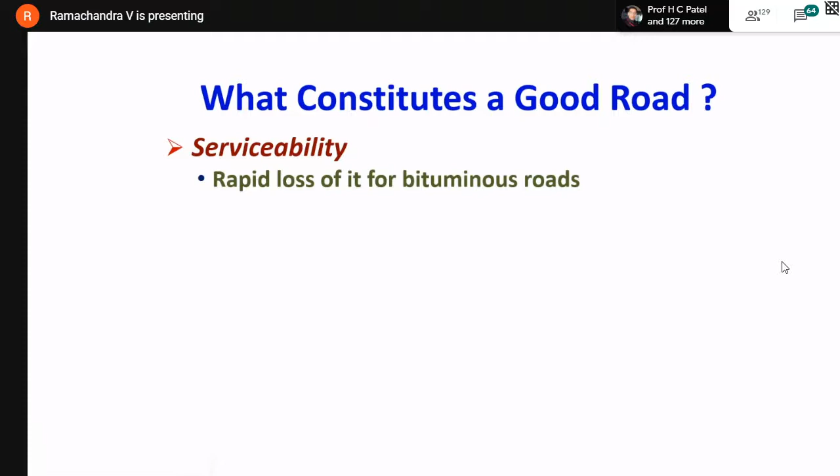Now, what constitutes a good road? When we talk of a good road, any road, bitumen or concrete, what constitutes a good road? Number one is serviceability, which means rapid loss that happens over a period of time. That happens generally for bitumen roads very fast - serviceability is low for bitumen roads, and there is very slow deterioration of concrete roads. Concrete has been used for all types of structures, whether buildings or bridges, but its usage in roads is not so much. These days there has been a lot of awareness on concrete roads because of the very slow deterioration of the material concrete compared to bitumen.

Second is durability, long-term durability. Longer design life and service life is always there for concrete roads - 20 to 30 years is the minimum. In fact, the Maharajas of Travancore constructed a concrete road between Trivandrum and Cochin, the coastal road in Kerala, during their time. And the Maharajas of Mysore constructed a concrete road between Mysore and Bangalore. These concrete roads gave very good service for about 50 to 55 years, then after that they deteriorated.

But we did not put one more layer of concrete on that - we converted them to bitumen roads. Bitumen roads every 2 to 3 years require another overlay. That is always there. Cost effectiveness - earlier, cost comparison was not in favor of concrete roads, but now it is. That is why the National Highway Authority of India, Ministry of Surface Transport, state governments, and local municipalities are all going in for white topping and concrete roads. In case of bitumen, initial cost may be slightly lower, about 20% lower, but the life cycle cost is very high, whereas it is the opposite in case of concrete.

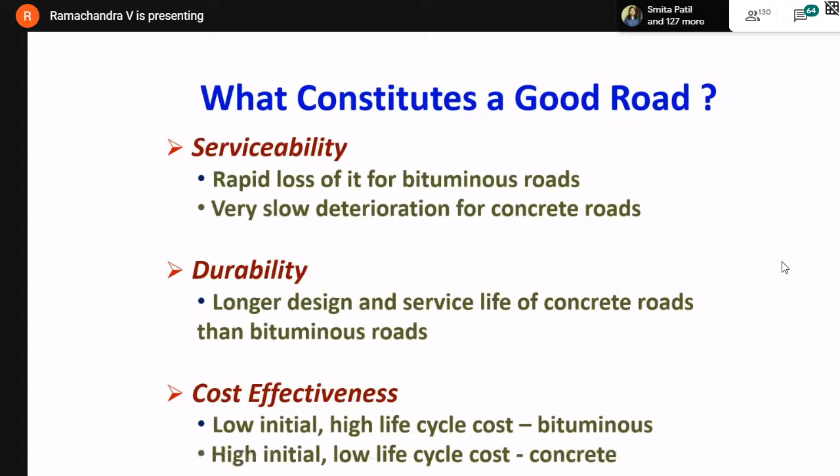When we talk of sustainability, let us understand some basics. As students, whenever we talk of sustainability, you have seen that 3-circle Venn diagram. There is the social impact of any project, the economic impact, and the environmental impact. When all of them are together, we talk about sustainability.

But when it comes to any project, whether a road project, bridge project, or any project, the sustainability matrix is this. Actually, sustainability should come in the central circle here, where all 3 circles meet, that is sustainability.

Now, the sustainability Venn diagram for projects: first is technical possibility, whether something is technically possible. White topping, the code was not there earlier; we were comparing concrete roads which are 300 mm thick. So technically, it is possible to do. Next, when technical possibility is there, the question comes: can we adopt it? Adoption is the practicality for the given situation, whether urban roads, rural roads, or very high traffic highways. Do we have the wherewithal to adapt it? That is the second question.

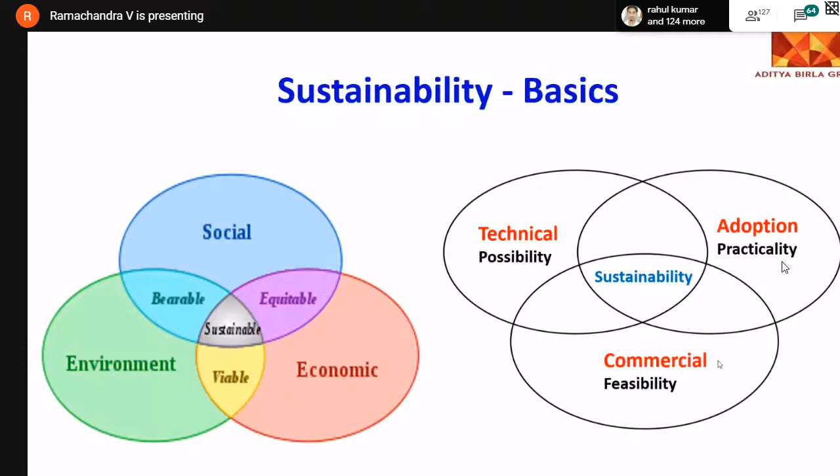Third and most important is commercial feasibility. If something is technically very good and you can adopt it, but it is highly expensive, people will not adopt it. If the cost is 100% more, nobody will adopt it. Therefore commercial feasibility is the essence. This is called the sustainability matrix for any project: technical possibility should be there, practical adoption should be there, commercial feasibility should be there, and also the material should be sustainable.

Now let us look at sustainability when we apply it to roads. Have I hidden some slides? Yes, I have hidden some. I will just open these 2-3 slides, I think these were required. Now, for comparison, I have taken this.

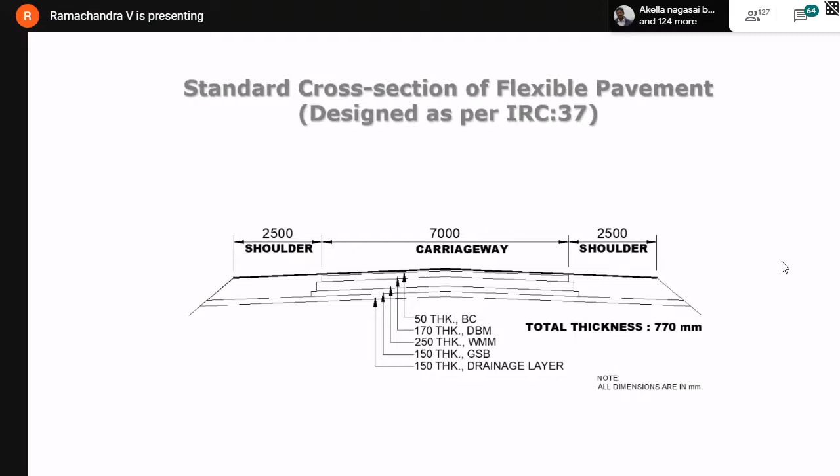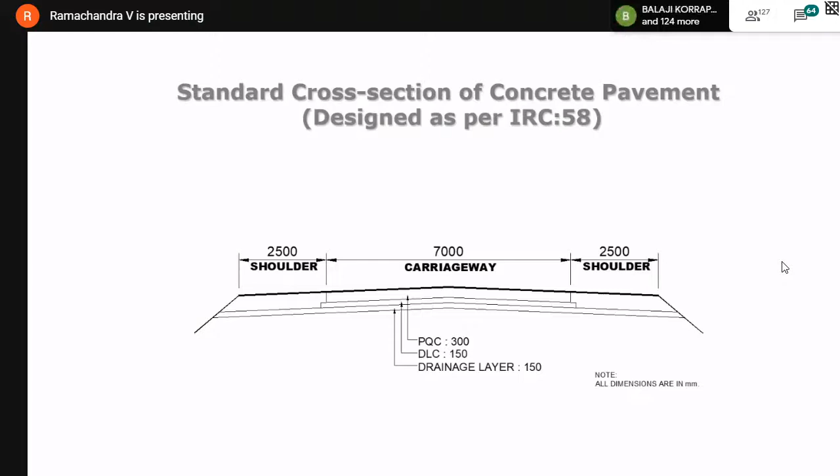I have taken a soil CBR of 5 and a traffic density of 150 million standard axles for heavy vehicles on a 2-lane road. I designed it as flexible pavement per IRC 37, and rigid pavement, concrete pavement, as per IRC 58. For bitumen roads, total thickness is 770 mm, consisting of drainage layer, GSB, WMM, DBM, and bitumen concrete. For concrete roads, it's drainage layer of 150, dry lean concrete 150, plus PQC 300, totaling 600 millimeters. Compared to 770, the total thickness comes to 600 millimeters.

Now let us come back to sustainability basics. If you calculate the consumption of stone aggregates for maintenance over a 20-year period, comparing per kilometer of 2-lane road, 7 meters wide, 1 kilometer long: in case of flexible pavement, for periodic renewal you require about 790 cubic meters of aggregates, and for overlay you require 3,360 cubic meters, meaning overlay every 5 years - at 5, 10, 15 years you require so much. Therefore, for a 20-year period, flexible pavement requires 4,150 cubic meters of stone aggregates, that is coarse aggregates.

Whereas in case of concrete pavement, whatever you put initially, that's all - for the next 20 years you don't require aggregates. Therefore, that contributes to sustainability in construction. Bitumen is a binder which is imported, whereas cement for concrete is an indigenous material.

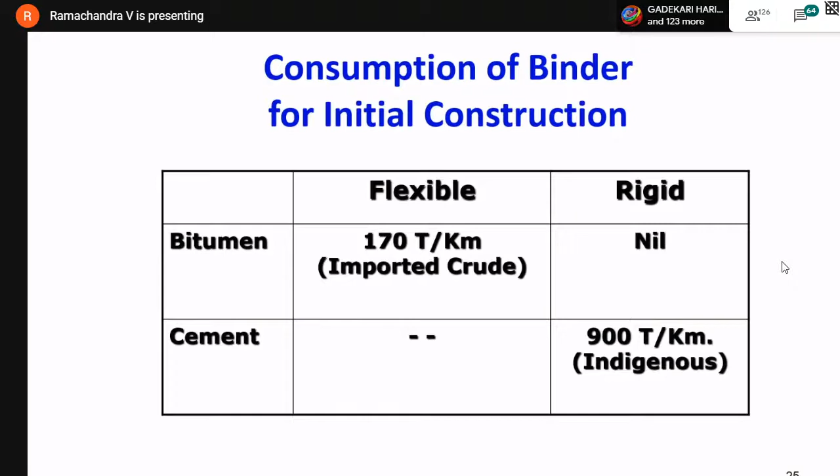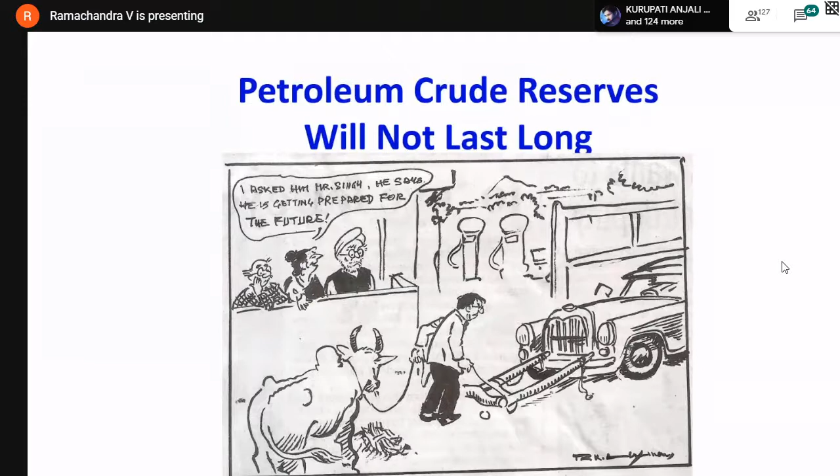Now, this is a cartoon that came in Times of India by R.K. Laxman some years back, more than 7, 8, 10 years back, when Dr. Manmohan Singh was the Prime Minister. Petroleum products don't last for a long time. R.K. Laxman is saying he is preparing his car for the future to be run by a bullock, because whether petrol is available or not, he doesn't know. So availability of petroleum is one issue. Imported bitumen - India produces only 30% of bitumen within the country, the remaining is imported. Therefore we need to be ready. That is one more issue related to sustainability.

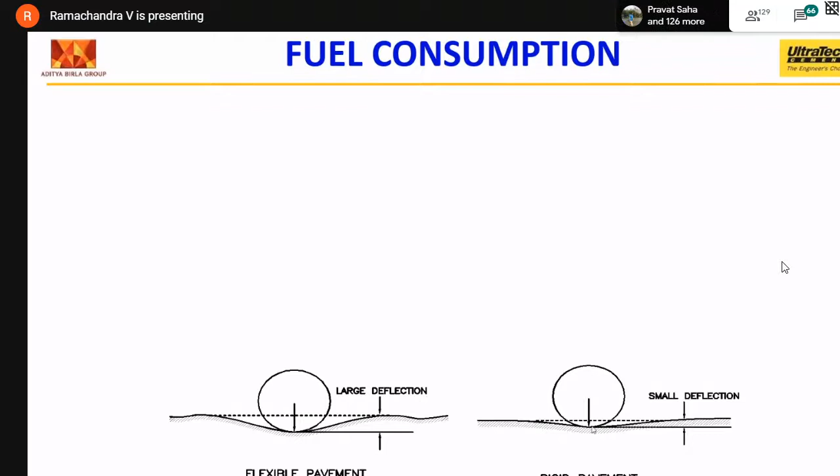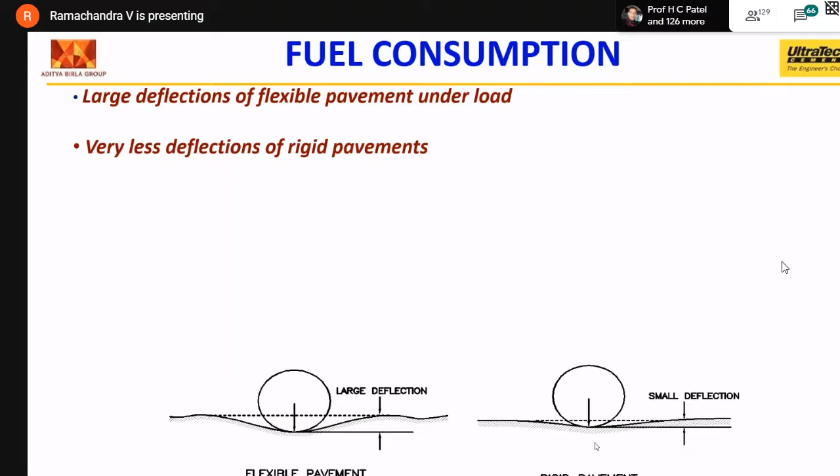That is the reason. So these are the statistics from Ministry of Road Transport. In case of flexible pavements, because the deflection is quite large, it is a flexible pavement, deflection is quite large. In case of rigid pavement, the deflection is quite small because it is rigid. Because of this, there is a fuel consumption saving. Large deflections under the load in case of flexible pavements, very less in case of rigid pavements. Therefore, less fuel is consumed on rigid pavements. Global studies show that the fuel consumption in case of heavy vehicles is about 10 to 15% less on concrete highways.

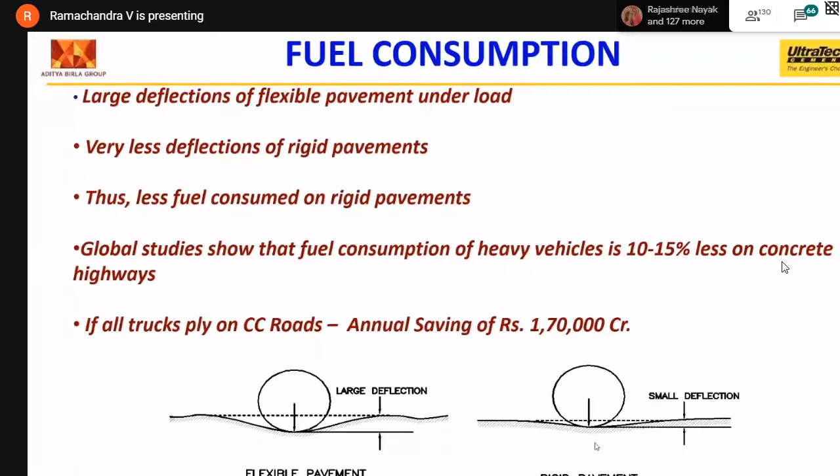Now, this is a study done by CSIR also in between. CSIR has done a study. Based on this study, what they have said is saving, fuel efficiency of heavy vehicles increases by about up to 14% in case of concrete roads. Therefore, if many of our highways, if all our highways are made concrete, the annual saving only due to fuel consumption savings would be to the tune of 1,70,000 crores. That is a simple multiplication of this total number of kilometers of national highways.

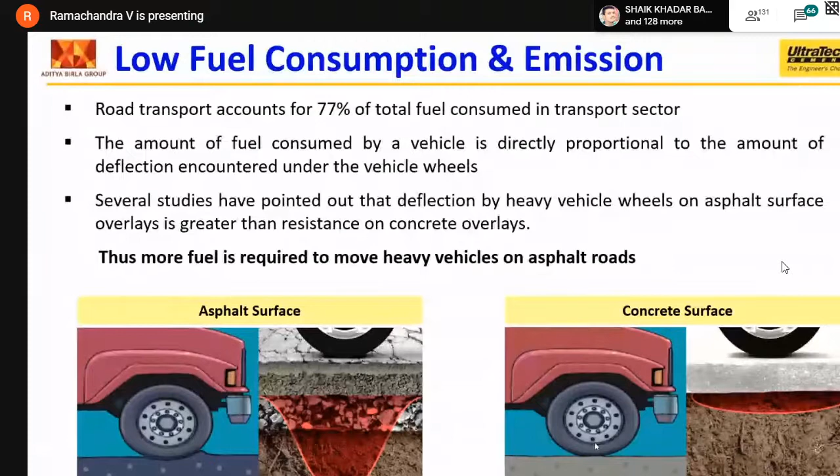Now, not only during operation, but also during the initial construction, the fuel saving and fuel consumption is always lower. As you all know, road transport accounts for about 77% of the fuel consumed in the transportation sector. And the amount of fuel consumed by a vehicle is directly proportional to the amount of deflection that you have. More the deflection, more the fuel that is consumed. And several studies have pointed out that deflection by heavy vehicles consumes more fuel.

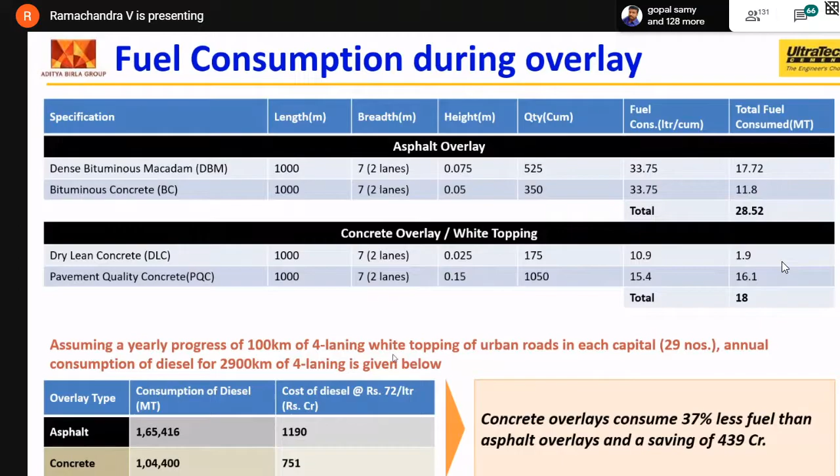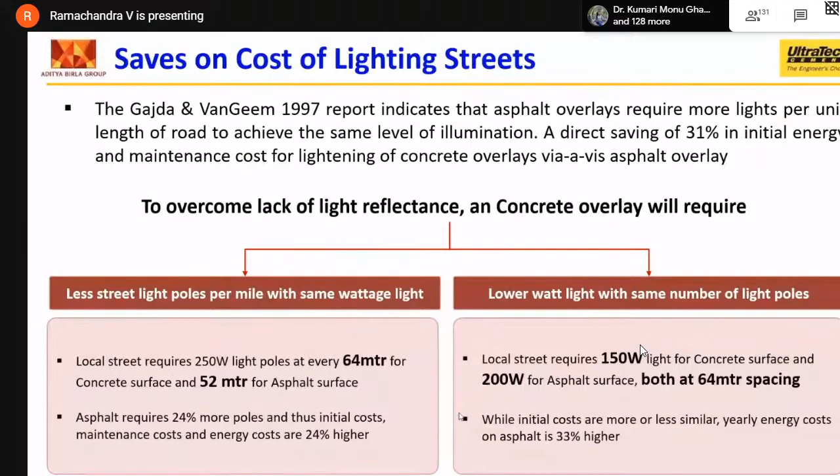This can be interpreted in a different way also, it saves on cost of lighting the streets. There is a report, the Gajda & VanGeem report of 1997, slightly older, 20 years plus. It indicates that asphalt overlays require more lights per unit length of the road to achieve the same level of illumination. There is a direct saving of 31% in the initial energy, based on the same reflectance calculations. And this is what I have already shared with you.

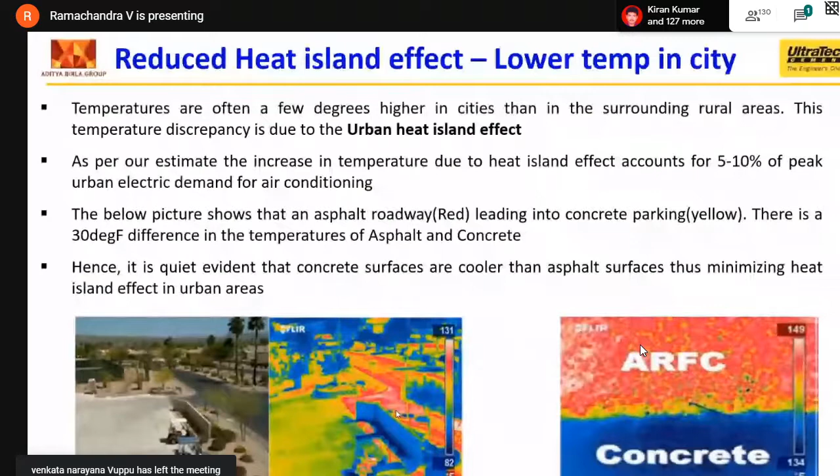Now you don't require research to do this. You try to go out on a summer midday, around noon, when the day temperature is very high. Walk barefoot on a concrete road and a bitumen road when the day temperature is 45 degrees Celsius. Then your legs will tell you in which case the heat effect is much more on your feet.

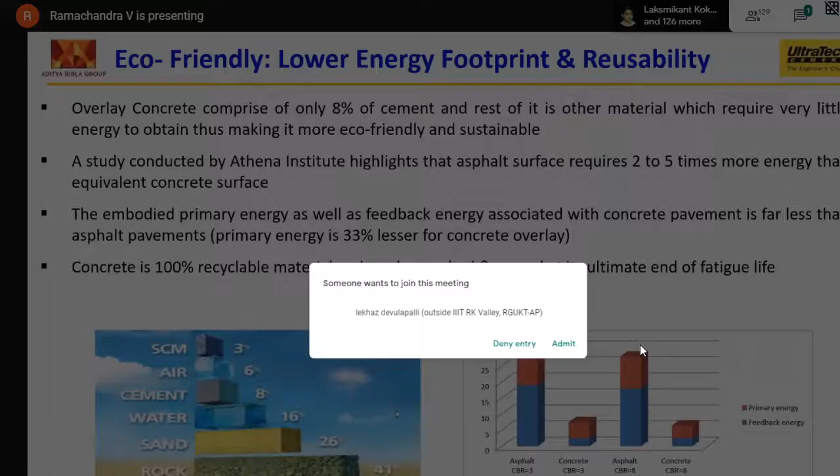Now, as far as energy footprint is concerned and reusability of concrete or bitumen is concerned, even there concrete roads score much better. It is because of these reasons. People say cement produces a certain amount of carbon dioxide. Yes, that is true. But when you make concrete, cement constitutes hardly 10% of concrete. The remaining 90% are aggregates. Therefore you take the contribution of cement and the contribution of all other things. Same thing you take in case of bitumen also.

A study conducted by Athena Institute highlights that asphalt surface requires 2 to 5 times more energy than the equivalent concrete surface. That means the embodied primary energy in case of concrete is much less compared to that of asphalt. Secondly, concrete is 100% recyclable. Bitumen also to some extent is recyclable, but concrete is 100%. In fact, recycled concrete aggregates can be used once again in making of concrete. As per Bureau of Indian Standards, it can be used in plain concrete and reused at the end of its ultimate life or fatigue life.

Now, as per LEED recognition, LEED is the green rating agency. LEED stands for Leadership in Energy and Environmental Design. It recognizes the sustainability aspects. Based on all these factors, local availability, embodied energy, and so on, for concrete the rating is 61, whereas for asphalt it is 30. Concrete is rated as intermediate green, whereas asphalt overlay is rated as not green. Therefore, concrete roads are definitely much more green or sustainable because of all these reasons. It is much more sustainable.

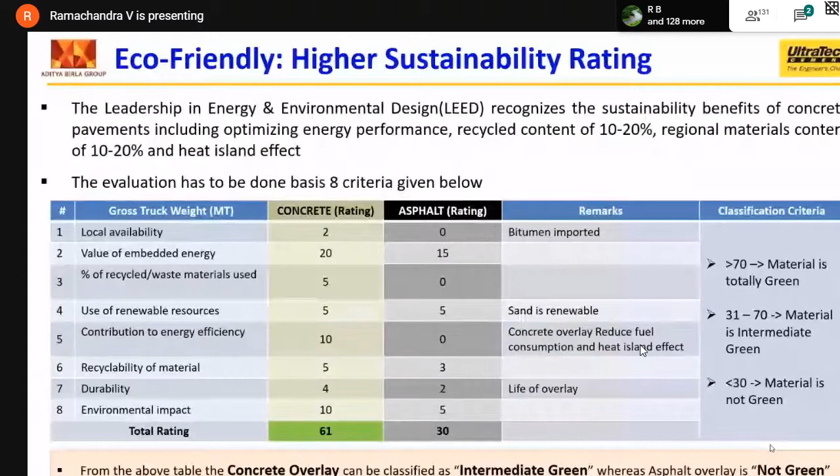In case of concrete, as I said, you can reduce the clinker content. You can use fly ash, you can use slag. As per IRC specifications, you can use blended cements with up to 35% fly ash if the blended cement is made in the factory, whereas at site you can add 25% fly ash. Whereas if you use GGBS at site or in the plant, you can replace up to 50% of clinker with slag cement.

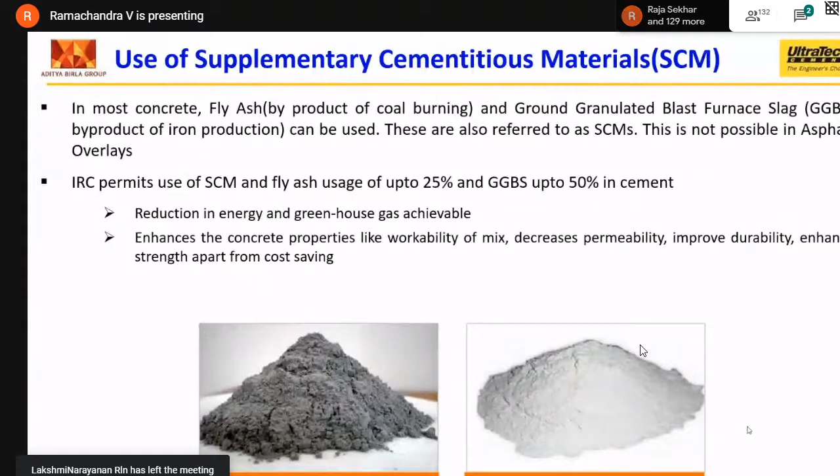Now, I have been continuously saying that concrete roads are good, absolutely good, and so on. Are there no problems with concrete roads? Yes, there are certain issues with concrete roads, let me take you to that also. Number one, whenever in city roads we make a new road, there are a lot of utilities under the road, whether it is electric cables or whatever. People start digging, several agencies for water supply, sanitary or electricity keep on digging the roads. How to avoid digging of concrete roads, that is number one. Number two, noise is more when you are driving on concrete roads. These are the two issues, definitely it is an issue we have to consider. How to address these issues?

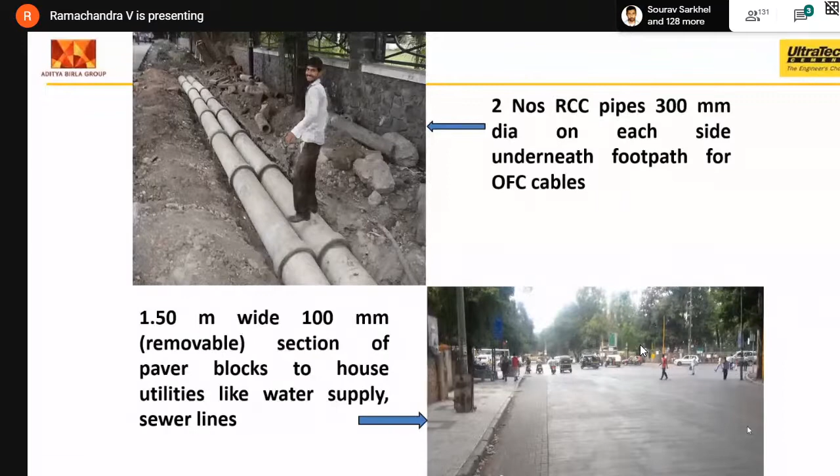As I said, in Pune and other places, at regular intervals when constructing the road, you put a cross duct—every 50 or 100 meters—so that you can take the services within these ducts without having to cut the road. You can see in this photo there are cross ducts provided where you can access the ducts and cross the road instead of digging it up.

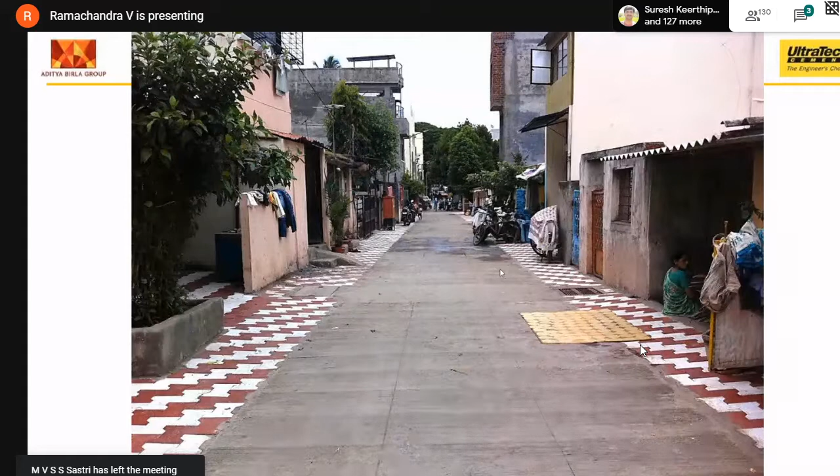As far as noise on roads is concerned, when driving on a highway with concrete pavement, the noise is higher than on a bitumen road. In a country like India, noise is not a very important concern—you know how Indians are with respect to noise. If you still doubt it, just see that during Diwali, nobody cares about this.

On the highway, one method to reduce noise on concrete roads is through texturing. In India, we normally do horizontal texturing, but there is another way—longitudinal texturing—which reduces noise on roads. In America, they do longitudinal texturing, and that reduces noise. In India, we don't do longitudinal texturing because the same road is also used by cyclists, and it may create discomfort for them. Therefore, we go for cross surface texturing instead.

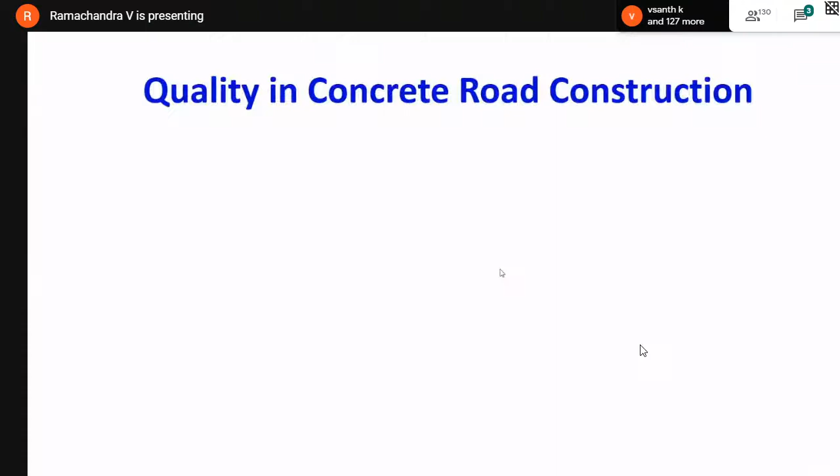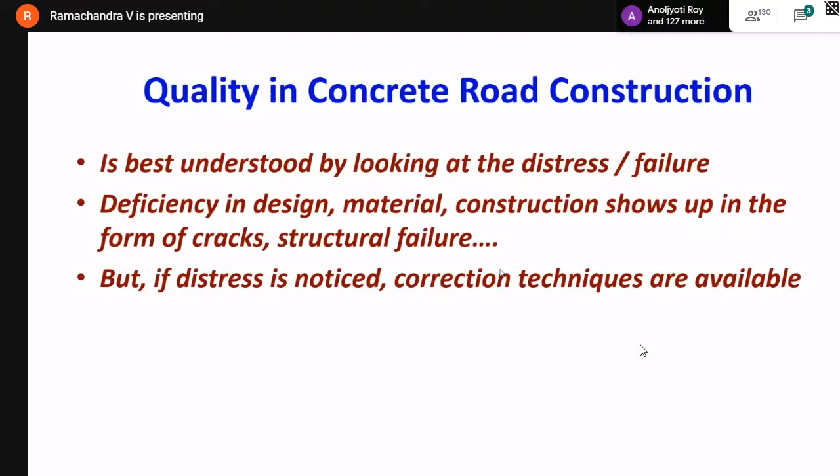Now, quality in concrete road construction. How do we understand quality? Quality is always understood by looking at distress or failure. Deficiency in design, material, construction, etc. shows up in the form of cracks or structural failures. But if the distress is noticed, correction techniques are available.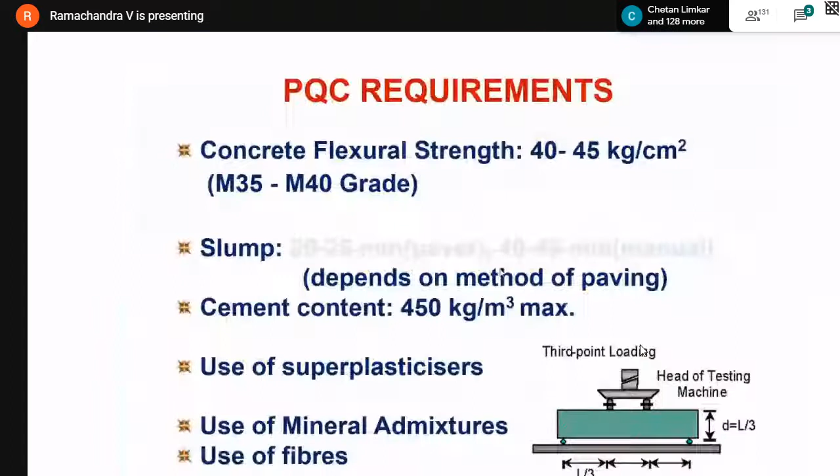What we must follow are the codes of construction: IRC 58, IRC 15, 44, 57, 62 for rural roads, and 83 for maintenance, rehabilitation and retrofitting of concrete roads. I was closely associated with the last code, IRC SP 83, which was revised very recently—in the last 2 years. If we stick to the specifications in the codes of practice, most problems associated with construction can be reduced or avoided. For normal traffic and low traffic, these are the codes to be followed, which I already discussed in my first presentation.

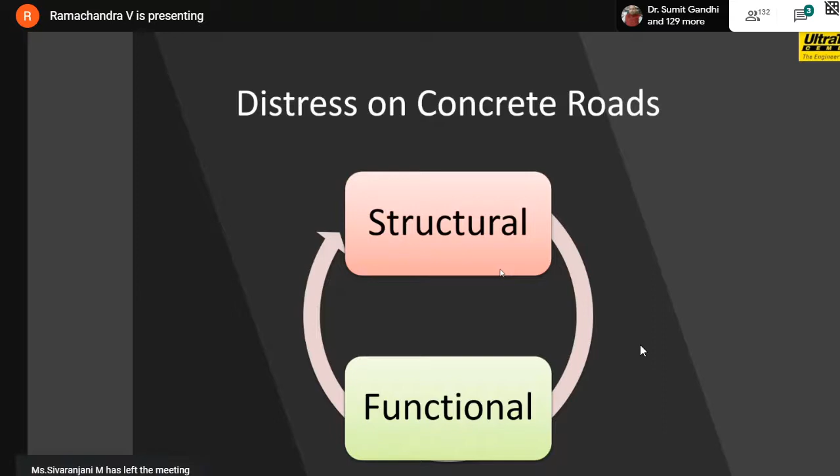Now let us go to distress on concrete roads. I have covered the sustainability part. Now, what are the distresses observed in concrete roads, and how can we overcome them? Distress or repair can be classified under two heads: structural distress and functional distress. Structural distress should be attended to immediately. Functional distress needs to be attended to, but it will not affect the structural capability of the concrete. Let us see both of them—what are the types of distresses and their causes.

Whenever you think of concrete roads, there are different varieties of cracking. You can get transverse cracking, longitudinal cracking, corner breaks, durability de-cracking, different joint defects, seal damage, spalling, and lots of surface defects like map cracking or shrinkage cracking, scaling, polished concrete, polished aggregates, worn out texture, pop outs, and so on.

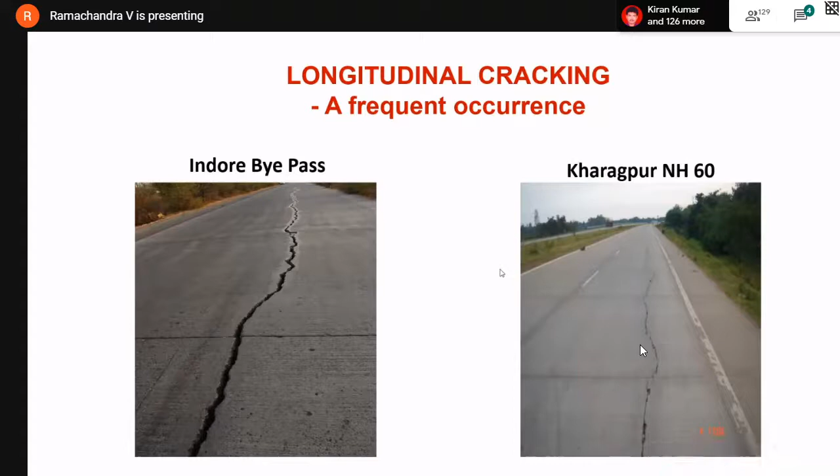Now you can see there is longitudinal cracking here. There is a particular reason for that. It is not due to the material; it is because of certain behavior of the structure. This is a structural crack. Now, we are talking of concrete roads, not white topping. In white topping, it is 1 meter by 1 meter spacing. Here it is 3.5 meter by 4.5 meter - that is the panel size.

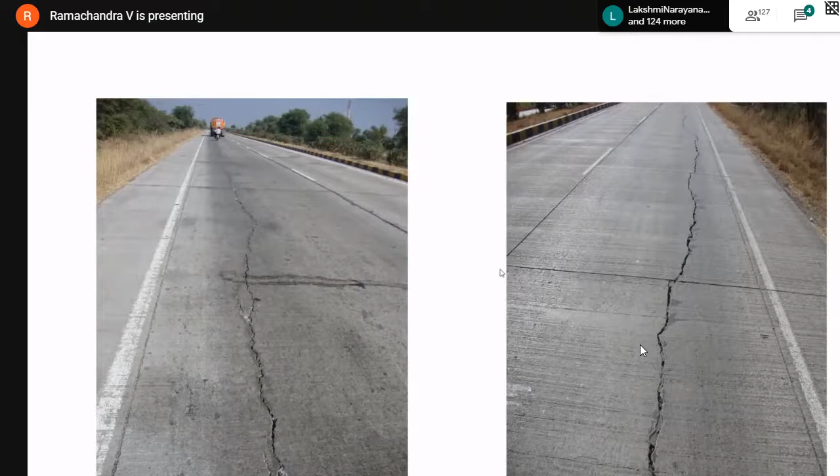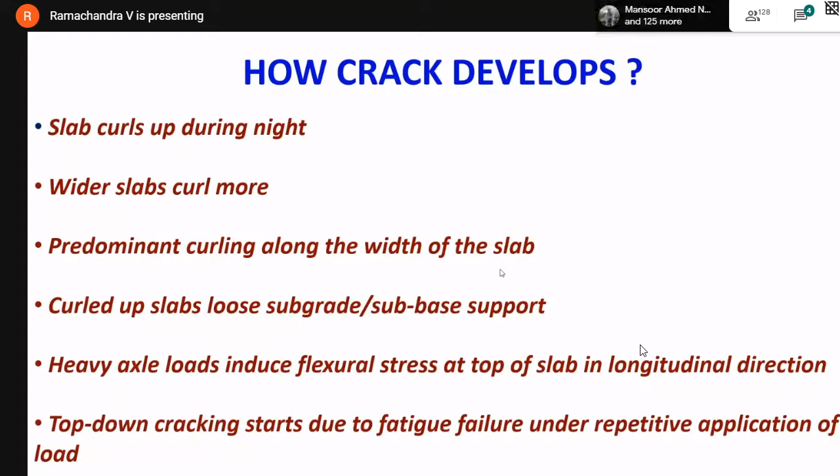Now, why do these cracks appear? It is because the slabs curl up during night, and wider slabs curl more, with predominant curling happening along the width of the slab. The curled up slabs lose subgrade or sub-base support, and heavy axle loads induce flexural stress at the top of the slab in the longitudinal direction. This also happens due to top-down cracking, which starts from fatigue failure under repetitive loading.

Now you can see here, the reason is you have shoulders for these highways. If the width of the road is say 7 meters, 3.5 meter is one cut and another 3.5 is another cut - that's fine. But suppose there is an extension, a shoulder stretch, that makes it 9 meters. Therefore it becomes 3.5 plus 3.5 plus 2. Now if this plus 2 is there, that creates longer spacing. Therefore it is towards the outer edge that you will normally see these longitudinal cracks.

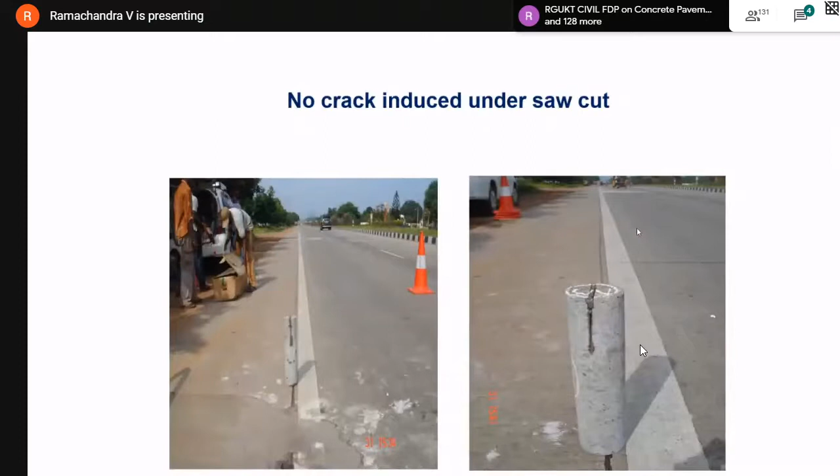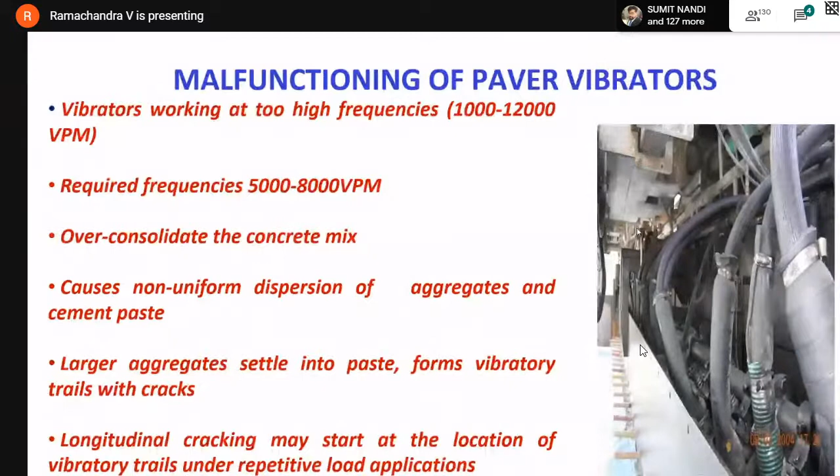Therefore, the simplest way to avoid this is to keep these vibration frequencies at around 8,000, less than 8,000 vibrations per minute. So these vibratory trails can be avoided if you control the vibrations per minute. The other types of distresses, other than these longitudinal cracks and vibrations, are the blow-ups, faulting of transverse joints, etc. Each one of that we will see in the next slides.

Let us go to surface defects now. The surface defects are not structural, they are functional. Say, for example, map cracking or plastic shrinkage cracks. This is very common in case of concrete pavements. Why does it occur? It is because the water cement ratio is very low and admixtures are there. That low water cement ratio, when the concrete panel is subjected to either high wind pressure or high day temperature, causes evaporation of the surface water of concrete, and that leaves these cracks. These cracks are all very random cracks or map cracks - there is no regular spacing or fissure pattern.

Now, that is why it happens. So what is the best way to avoid it? I have already shown in my previous presentation - the best way to avoid it is either to cover it with a plastic sheet for 1 day, 24 hours, or to spray curing compounds. These curing compounds are basically aluminum based compounds, wax based compounds.

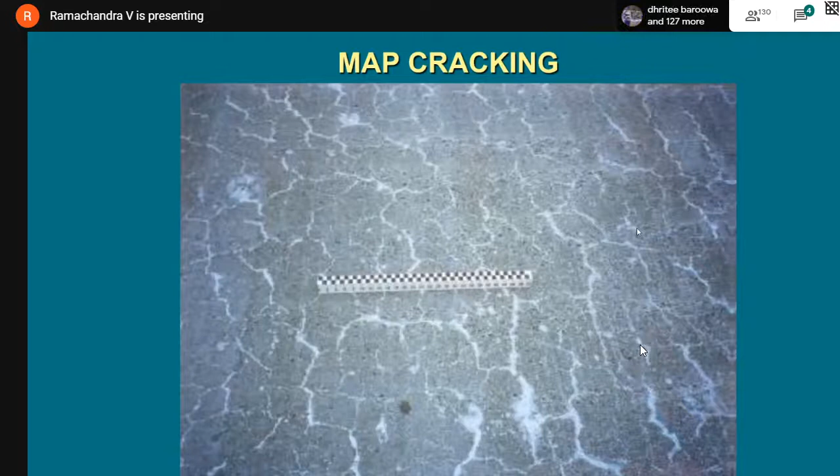These wax based compounds, many of them are available in the market. You spray it on the surface and it creates a wax layer on the road surface. Water will not evaporate for 24 hours, and this map cracking or plastic shrinkage cracking will not come after 24 hours. Therefore, the first 24 hours is very essential to maintain the quality of concrete. Either cover it with plastic sheet or spray this curing compound, and that will ensure these surface cracks will not come. Now this is how it looks like, surface shrinkage cracks.

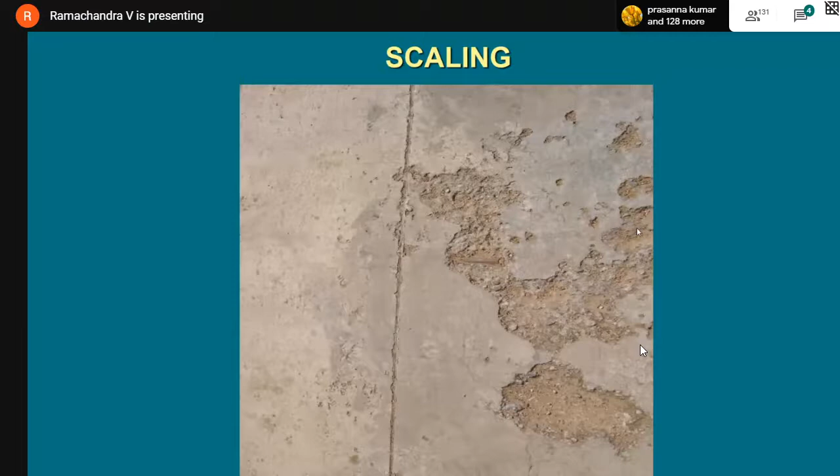Sometimes you may have scaling. That is, if finer materials are there at the top - I showed you earlier that there should be no segregation, no bleeding. If there is segregation, coarse aggregates settle at the bottom, finer particles come to the top, and they erode. That is called scaling. It may appear like this. If your concrete is cohesive, you will not get this kind of scaling.

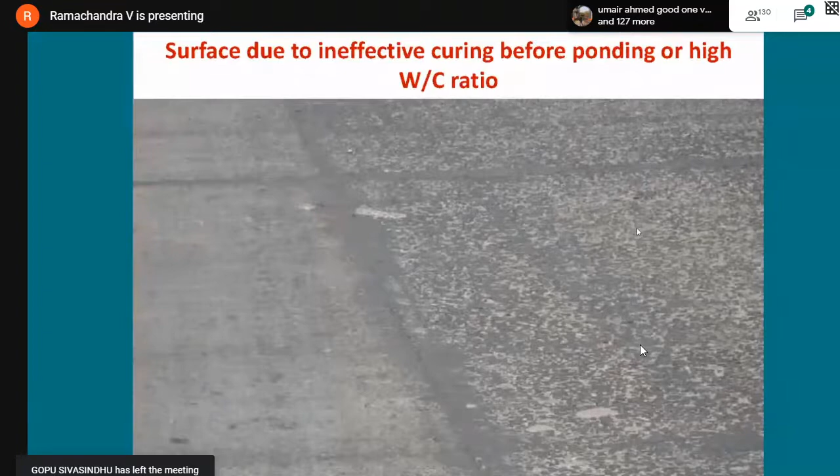Now if finer aggregates go off, you will get what is called a polished surface. This polished surface exposes the aggregates. These exposed or polished aggregates, you will see the effect like this. Now this happens due to ineffective curing before we do ponding, or very high water cement ratio. You can see one part of the road is good, the other part is a problem. Therefore, the concrete was probably the same mix, but then high water cement ratio was there - a different batch of concrete with different properties. Therefore, you face this problem.

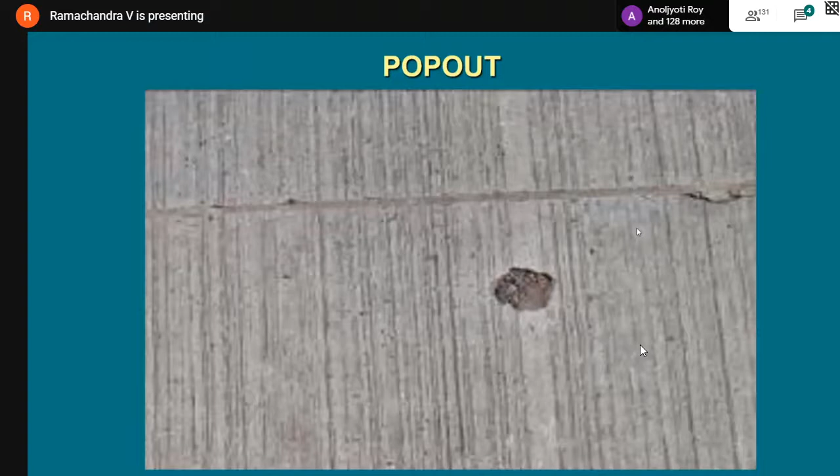Now, pop-outs like this - why do they come? Suppose when you are pouring concrete on the bitumen road, if you have not cleaned it properly, if there is some organic material or something on the road and you pour concrete on that, or when the concrete is green, it gets mixed with soil or some organic material. After some time, it comes out and you will see this kind of pop-outs. This is one problem that needs to be filled later on. Why does this happen in case of concrete?

Because initially fresh concrete is very soft. Once you lay concrete and do texturing and all that, you should ensure that nobody walks on the roads, nobody should walk or cross the roads. But unfortunately, in India, it is very difficult. Maybe without knowing, dogs can run across the roads because dogs do not know the properties of fresh or hardened concrete. Dogs can cross the road, but humans also do that. People think they should leave a footprint of their life somewhere, but better on a concrete road, therefore their footmarks are always there. So after the concrete hardens, this will remain. That creates the pop-outs.

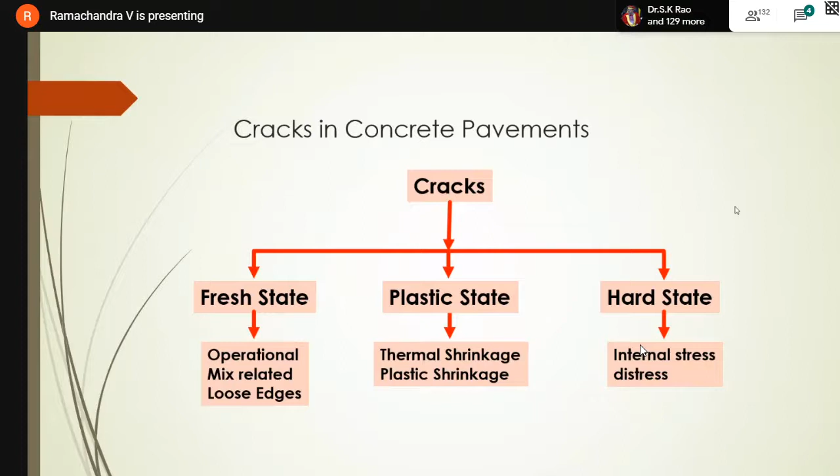Now, how to correct that? It is possible to correct - I'll show you. Now let me come back to cracks in concrete pavement and how to treat them. Cracks can appear in concrete in 3 stages: one in the fresh state, another in the plastic state, another in the hardened state. In the fresh state, it can occur due to operational reasons, concrete mix related reasons, and maybe due to loose edges. In the plastic state, it can be thermal shrinkage or plastic shrinkage, or in the hard state it can happen due to internal stress distress.

Now, concrete in the fresh state - operational reasons - maybe due to the paver it may happen, maybe due to the texturing machine, and manual intervention also sometimes. Whereas in the concrete mix related reasons, it can happen due to variation in concrete, higher slump content, or lower slump can also create this kind of thing. In case of high dosage of OPC, if you use 450 kgs of only OPC, the heat of hydration in concrete can also contribute to a higher amount of cracks. Then finally, loose edges - in case of slip form pavers, this can happen, cracks parallel to the edges. This only happens when you use slip form pavers.

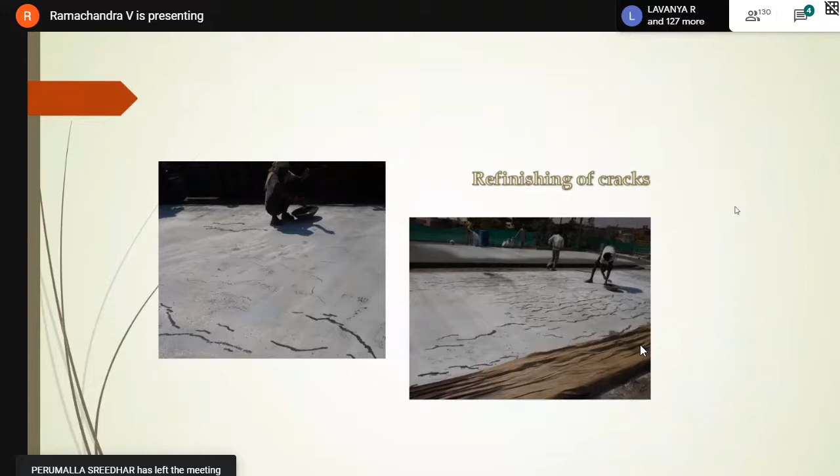Now, this shows the effect of poor slump control. If it is in the fresh state, as I said, if you get cracks, you can refinish this with cement slurry - a thick mixed cement slurry - you can finish, re-trowel or refinish the surface. You can correct these cracks if the concrete is in the fresh state.

This is the method of doing this - these are the repair techniques. In case there are pop-outs and organic materials that you had, there are good materials available today: polymer concrete, epoxy, liquid epoxy, etc.

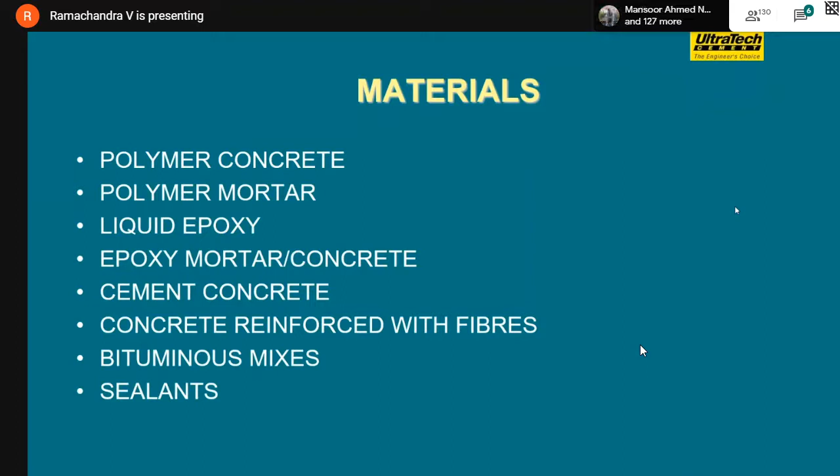Epoxy mortar, cement concrete, etc. These are all the different materials that are available.

As I told you, placing a plastic sheet will serve most of the purpose, or spraying this curing compound, that also helps in avoiding plastic shrinkage cracks.

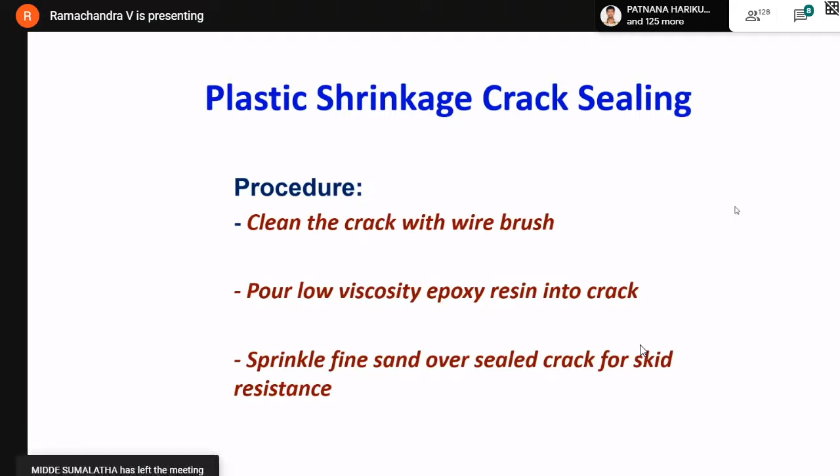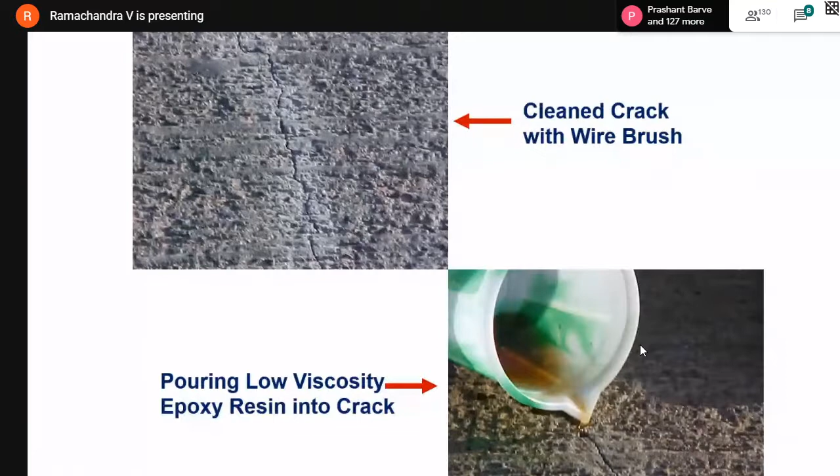Now the procedure is: clean it with a wire brush, pour a low viscosity epoxy resin into the crack, and then sprinkle fine sand over that. That is how you do it. This will ensure that the cracks don't propagate.

Sand is sprinkled over this, but then you will be seeing some marks here. That doesn't matter. Of course, it may give a bad optics, but then the road performs perfectly fine.

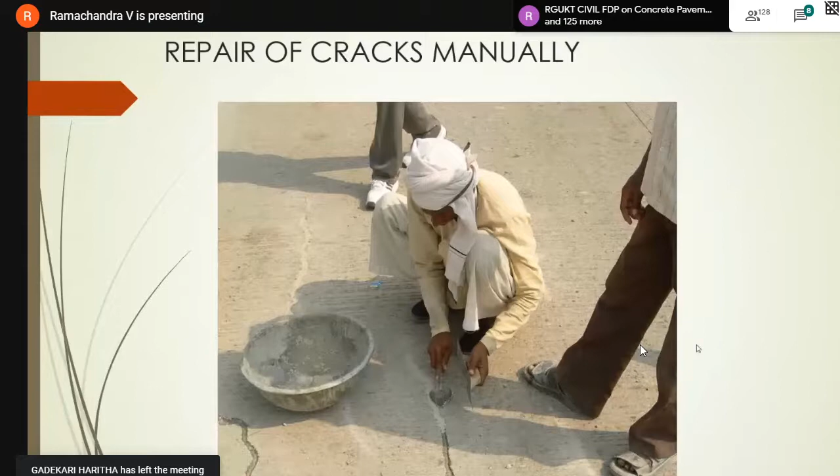If the cracks are wider, there are a lot of epoxies available today. Take these epoxies and slightly widen the cracks so that if the width of the crack is less than half an inch, widen it to 1 inch so that you can put these epoxies and finish it the way it is done here. Now sometimes the grinding surface texture will go away after some time.

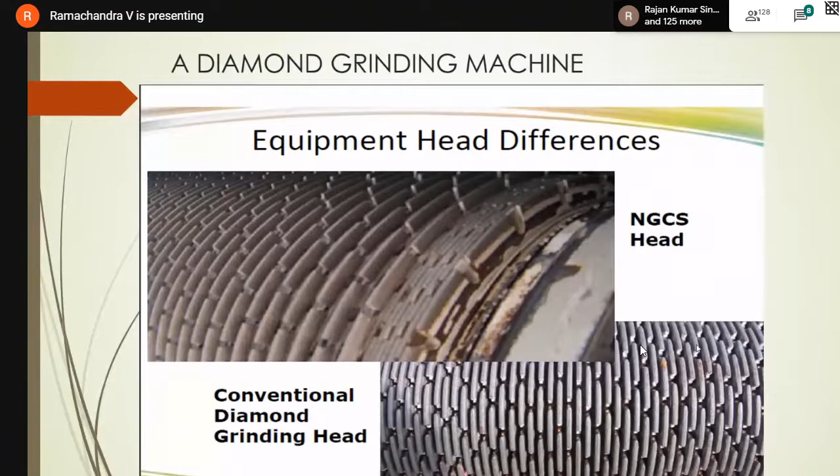This surface texture will not be there after some time; it will become very smooth. Therefore you have the diamond grinding machine. After 5 years, since the life of a concrete road is 20 years, you can grind it again and retexture it using this surface grinding machine, diamond grinding machine. This is how they are doing it. You can see that here.

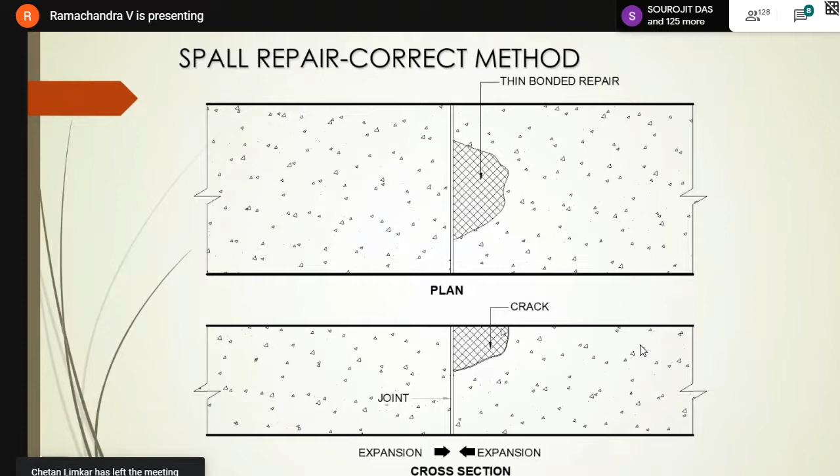That means in the elevation also, if the thickness is very less, you should cut it as 25 mm thick. This is what you can see - this was the spalling that had occurred, but cut it as a rectangular patch, just the way you do it in case of a bitumen pavement. Cut it to a depth of 25 mm, so that 1 inch depth is there, so that you can put the epoxies or grouts.

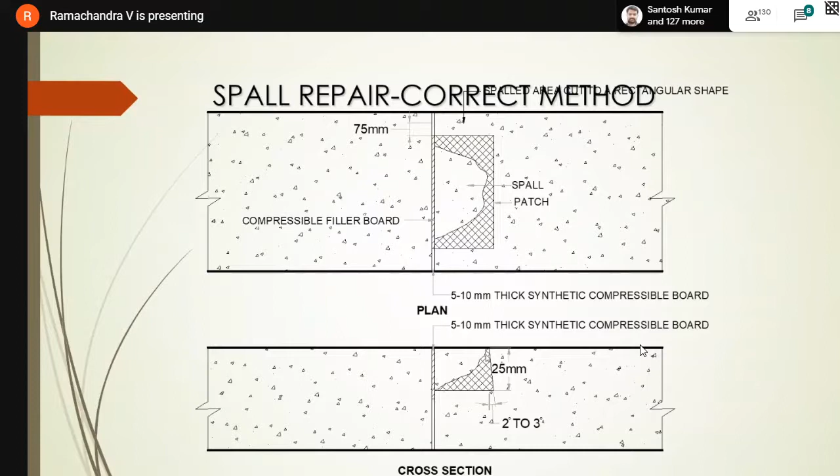Today you get a lot of grouts, and you can correct this. This is how it is being done: make it into a rectangle, put concrete grout into it. There are a lot of materials that are available.

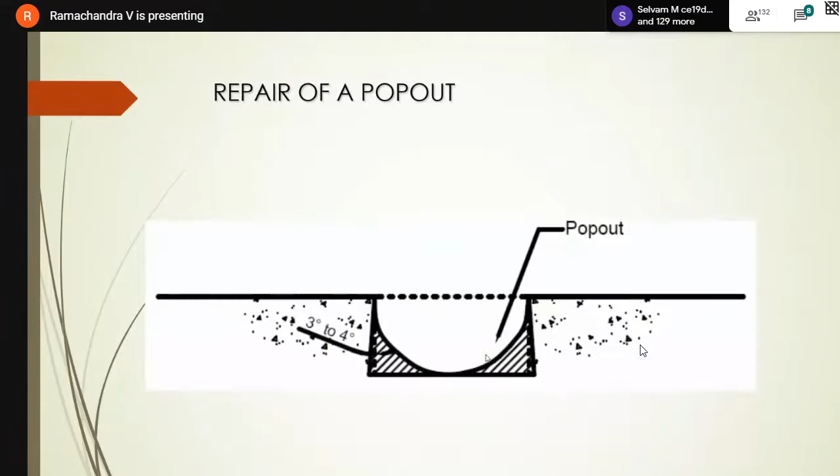Even these foot marks or pop-outs due to foot marks, they also should be made rectangle, and then they should be repaired. Make the pop-out into a rectangle as shown in the figure. You have a lot of materials.

Even Ultratech has got a material called power grout. If you put this power grout into the material, as you can see here, you cut it as a rectangle and then put it, and this has a property of getting 40 MPa of strength, not after 28 days - 40 MPa of strength in 24 hours. That is 1 day strength. You get so much strength that it can be opened to traffic.

Now, earlier you have heard of stitching cloths - if there is a tear, you stitch the cloth. Very similar to that, you can stitch the pavement also. If there is a full depth crack like this, what is done is you make a groove at some 30 degree angle to the horizontal.

Make a groove like this across the crack and insert a bar, and fill epoxy resin into this as an adhesive. Now you can put a 16 mm or a 20 mm rod; a 12 mm rod is also more than sufficient - a tie bar rod, same thing you can add, and you can grout it with epoxy resin as an adhesive. That will ensure that these cracks are closed and will not give any further problem.

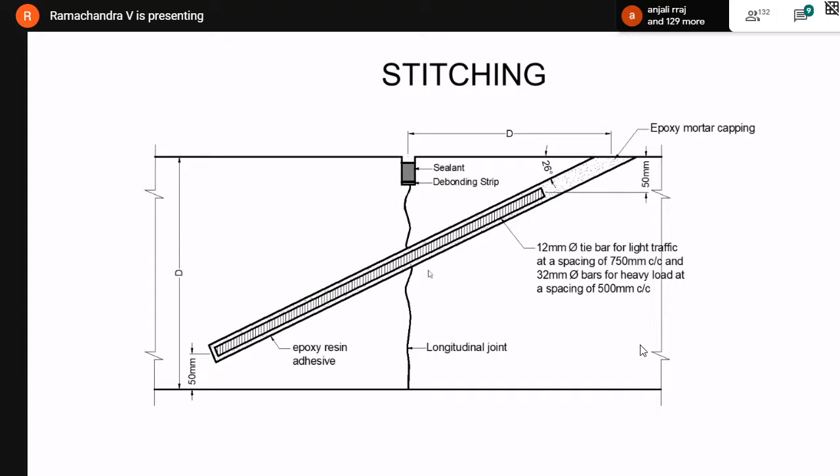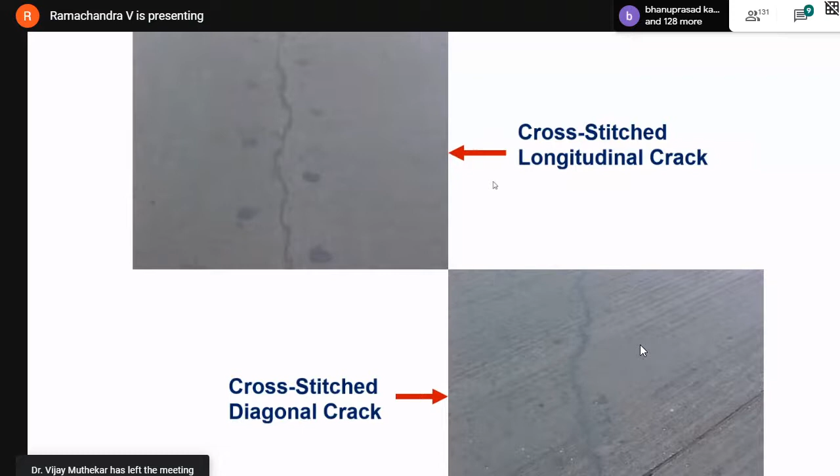You can see that once that is done, on either side it is done and filled, and this is the finished surface. Now this is how it looks after the cross stitching of the longitudinal crack is done. This is a diagonal crack that is cross stitched. This is a stitched slab.

Now the performance is perfect. Only thing is you may see that mark there, a color difference there, but that is okay - the pavement performance is established, is restored. Now another way of doing it is stapling.

The way we do stapling is with respect to using a 16 mm bar. You can see the top 25 mm is removed, and you put a steel staple bar, say 2 feet wide and 2 feet in length, 16 mm bar, and put a resin mortar into this and fill it with a groove at the top.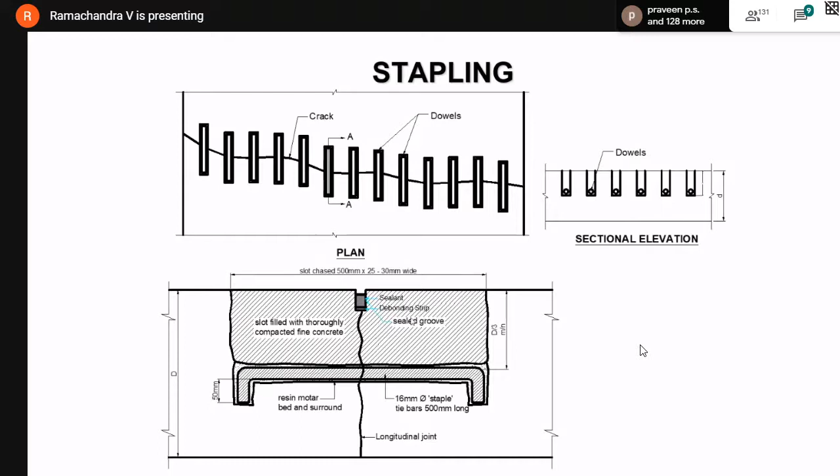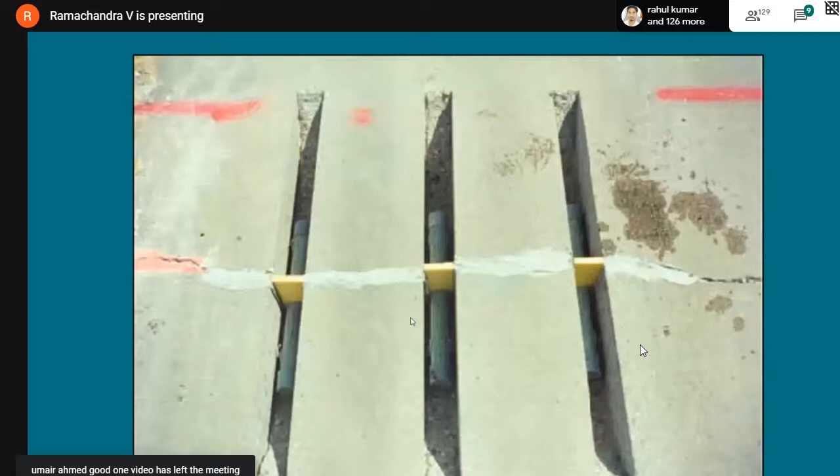That stapling will ensure that the cracks are sealed. You can see that a staple is put below, and above that, it's closed with mortar - the polymer mortar or the grout, epoxy grout. This is how it looks like after the repair is done.

Now these are all for the different varieties of cracks, structural cracks as well as non-structural cracks.

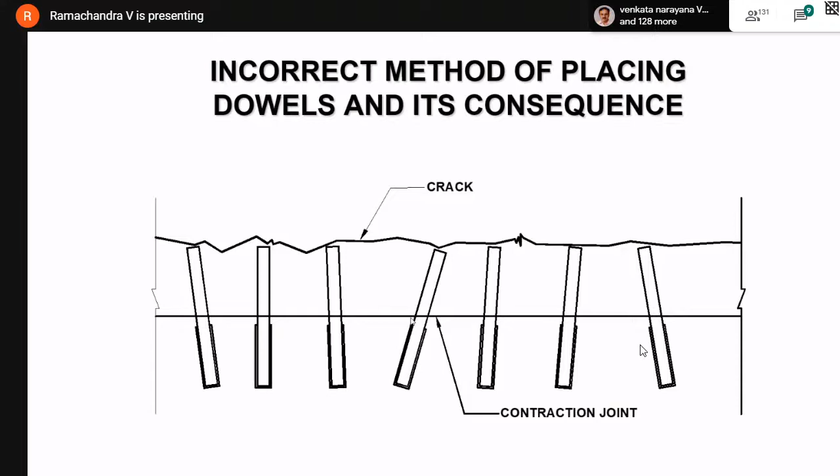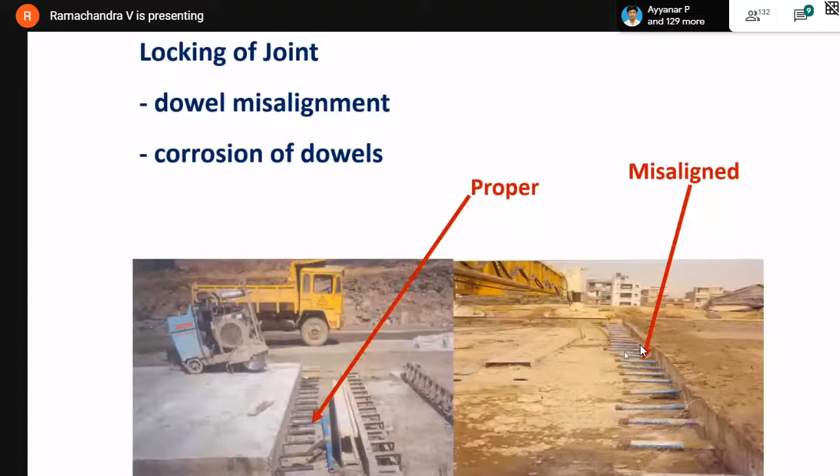What I would say is that dowel bars are very essential. Provide dowel bars properly, I repeat, properly. Instead of providing improper dowel bars, if somebody asks me, shall I drop providing dowel bars? That is better than providing dowel bars improperly. I hope I am making my statement clear - you must provide dowel bars properly. I don't say don't provide at all, it's better to provide them properly.

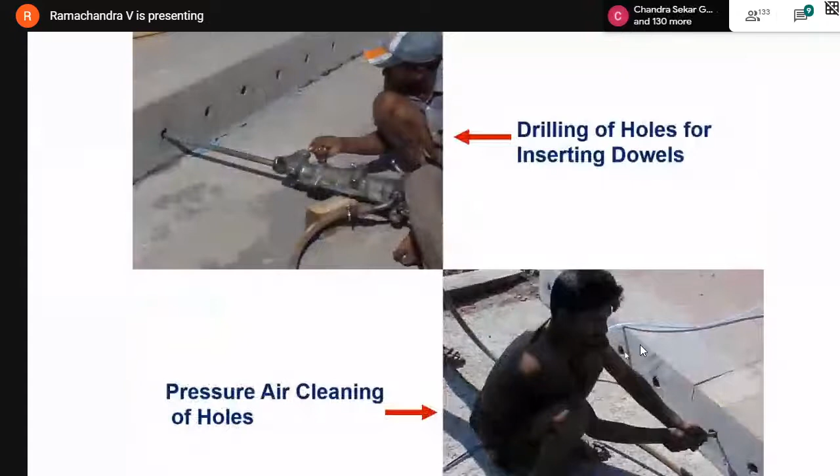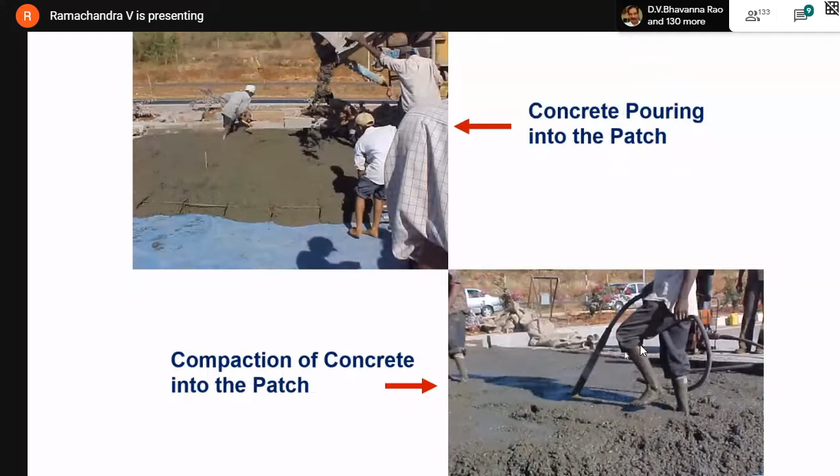Now, maybe one of the last few slides - if it is a full depth crack repair, then take out the entire depth and repair it. This is how it is taken out, full depth repair - cutting and removing concrete for the full depth, as you can see there. Then drilling of holes for inserting dowels, and once the dowel bars are inserted like this, pour concrete into that patch. Above that, you do brooming of this patch, curing compound spray, and so on.

Now, these are the different ways of overcoming repairs, different kinds of repairs in concrete roads. Now, I was talking to you, there was one question on precast concrete pavement. Very briefly, I'm covering that also here. Precast, pre-stressed precast concrete pavement is a solution for most of these problems of distress in concrete.

Many of these problems can be avoided if the concrete is done in the factory itself. Factory made product is always better than the site made product. Therefore, see, this is a new experiment in India - there is only one road that is done in Nagpur. We have tied up with VNIT Nagpur, and this road for about 450 meters, this work is already completed with M45 concrete.

With PWD, we have worked very closely with them to make this concrete. Some more photographs, I think, must be there or not there in this - okay, not in this presentation, it is in some other presentation.

The great advantage of this is that concrete precast concrete panels of 3.5 by 2.75 were made at the factory. They were brought to the site, placed one by the side of the other, jointed, and even the dowel bars were present. They were placed exactly one by the side of the other wherever dowel bars were there, and the joints were all grouted at site. So site construction is only grouting, nothing more than that.

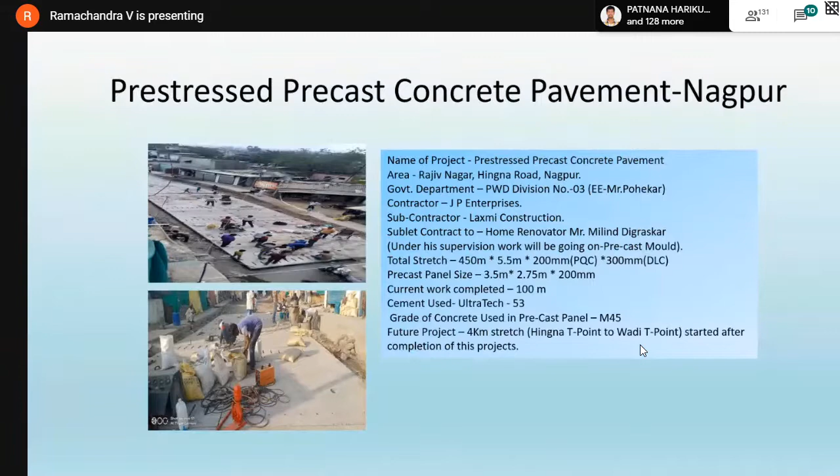Therefore, that is good enough. That is about the first precast concrete pavement in India, that is in Nagpur. So friends, with this, I am coming to the end of this presentation.

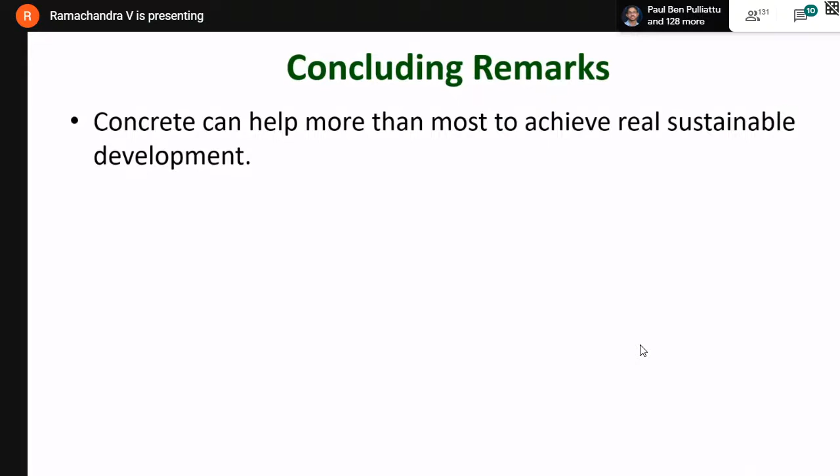My concluding remarks: concrete can help much more to achieve real sustainable development. I have explained to you why it is so. Concrete is more than a structural product, can be used for many applications, not only for buildings and bridges, but also for roads. That is because concrete has incredible design versatility and a lot of flexibility in design and construction. It bestows environmental benefits, economic benefits, and social and quality of life benefits.

I am fond of saying this every time: concrete is a democratic material. You may wonder, what is it I am talking about, comparing concrete as a material with democracy. How can these two be compared? Yes, they have a few things in common. Like democracy, where everybody can participate, concrete also can be made by anybody.

See, who is making concrete in India? Skilled, semi-skilled, unskilled, all sorts of people are making concrete. Therefore, concrete can be made by anybody, it is not necessary that an engineer should make it. And it endures, it is a very tolerant material, like democracy. Democracy is very tolerant, and like democracy, most of the time concrete is used well. Sometimes it is misused, sometimes it is abused, like democracy. And only when it is abused, it hits back, and in case concrete is abused, you will see the collapse of the structure, like a democracy collapse.

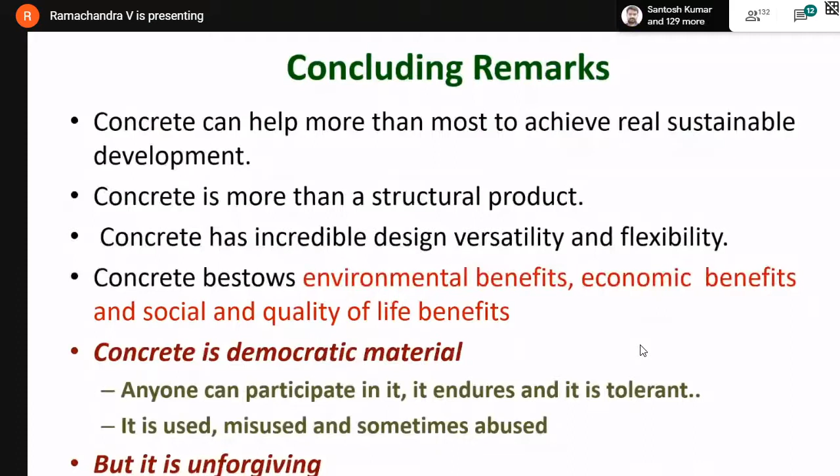And the last sentence is, please remember, concrete is an unforgiving material. You do a good job, it will give an excellent service, and you do something bad, it will not forgive you. It will give enough precautions, and with all that, if you still do something wrong, it will not forgive you. Fine. Therefore, with this, friends, I close my presentation.

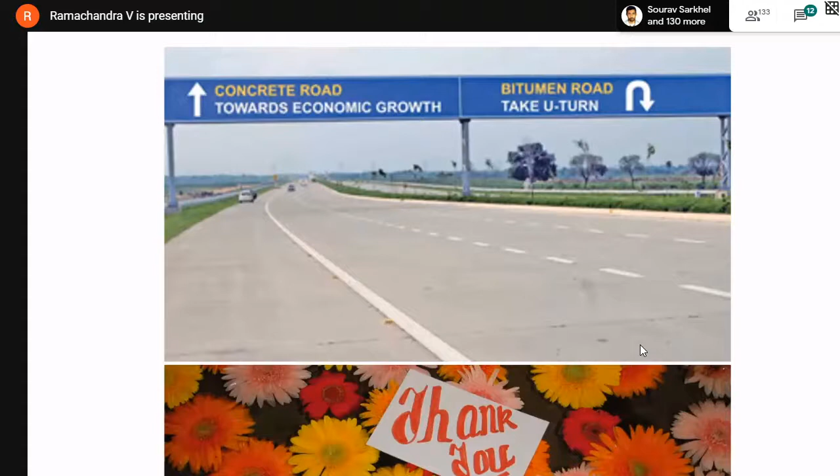I have taken more time than required. Concrete roads are always the best. I am not saying this because I come from Ultratech, it is not so. I have learned a lot of this concrete road technology from Dr. Kadiyali, CRRI, and IRC, and that is the reason why concrete roads are becoming popular in our country. Thank you very much.

Sir, thank you for the wonderful presentation. Really, you have thrown a lot of light on concrete pavement. And many of us also, some of the things like the repair of concrete, especially stitching and stapling, these are all new techniques, not even available in the books.

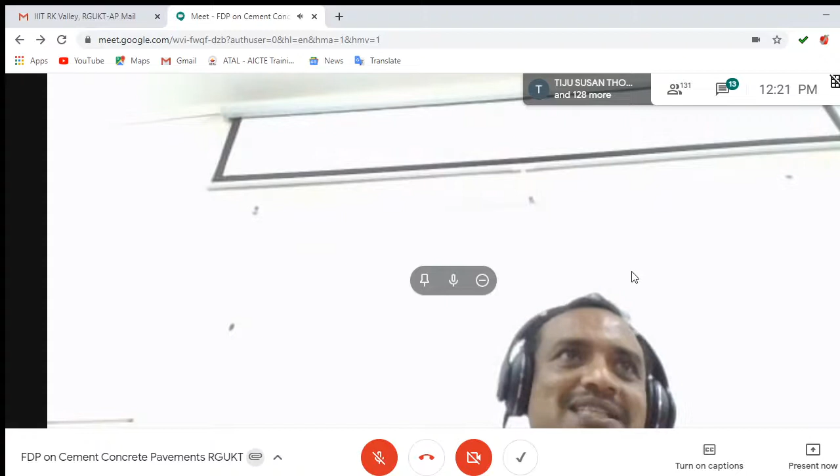Definitely people will take this up, and even in case of research, there are many topics available. They can work on this, for instance the stitching technique - what is the angle that the bar should be provided at, what will the problems be, how will it perform over time - all those things can be studied.